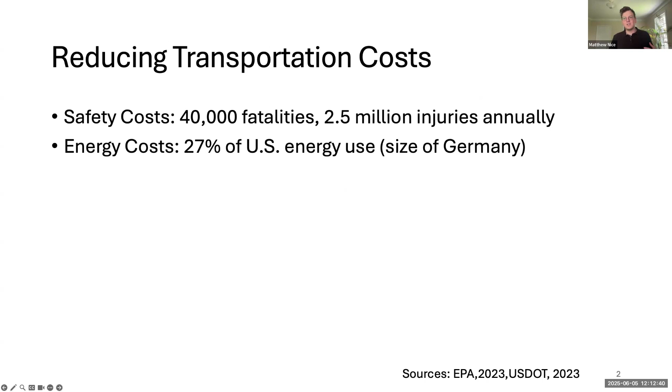In general, there are big safety costs in transportation that we're all interested in reducing, along with energy costs and economic costs. There are different approaches, probably well represented in this room, looking at how we can use transit to address these things, new and revitalized infrastructure, and changing and adapting policies to modern environments.

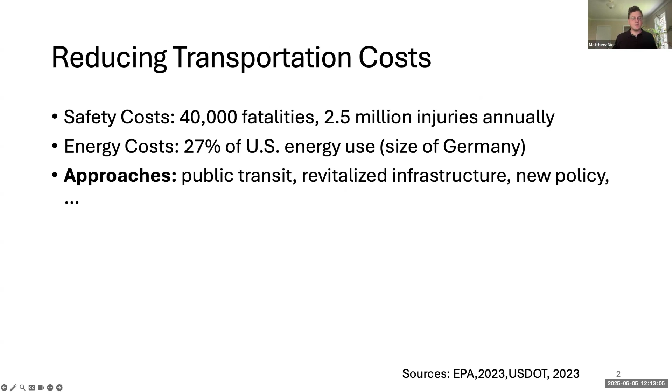All these are ways to attack these problems. My approach, as a researcher, is really just thinking about technologies and how they can help — that's my angle. Things like connectivity give new information pathways to act on problems, whether you're a pedestrian or, in this case, talking about vehicles. The same goes for automation — new pathways for making decisions and controlling cars. So again, they're just tools to try and address our greater problems.

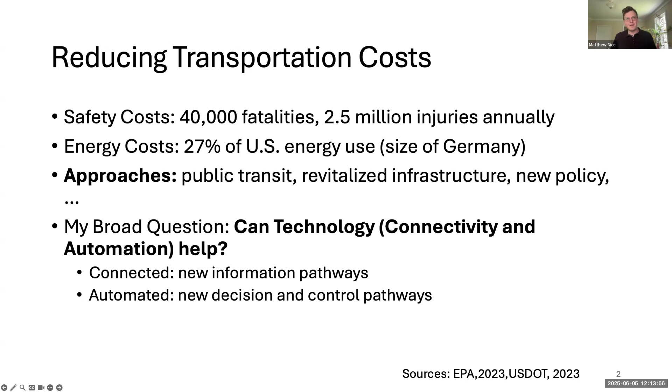A little bit of research history I think is really interesting is this idea of stop and go traffic, something we see a lot in the DC area — we see it everywhere, right? This was first filmed in a rigorous way back in Japan in 2008.

The video quality is a little low for our modern standards, but what you'll see is cars driving in an isolated ring road, just driving in a circle — there's no bottleneck, no crash, no merge, none of that stuff happens. But what starts to emerge is a bunching effect in the cars as they drive around, and the bunching effect gets larger and larger. You can see it traveling backwards from the direction of travel of these cars.

This is exactly what Griffin had touched on. It creates an inefficiency in slowing things down — an energy inefficiency from speeding, accelerating, and stopping — and also an increased risk of crash. All of these things are well documented at this point. It can come just from the interaction of people driving; you don't need anything else, just a lot of people driving on a highway for this to happen.

Fast forward a few years, and you go over to Arizona, where they ran this same experiment but added in a critical twist: they put in an automated driving vehicle, the one with the black arrow on top of it in the ring. Again, you see the bunching happening, and then they turn on the automated driving aspect — now the arrow is red — and it totally erases this effect.

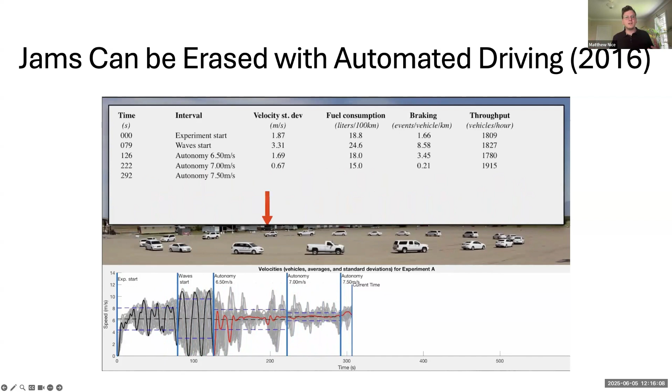It's a potential benefit, though it's still in an isolated environment here, a ring road, not the I-95. It still shows that there's potential in using technology to basically solve something we couldn't do just with the natural physics of driving. It adds something - only one car out of 21 removes something that in principle is solvable, but you needed a little push from technology to smooth things out.

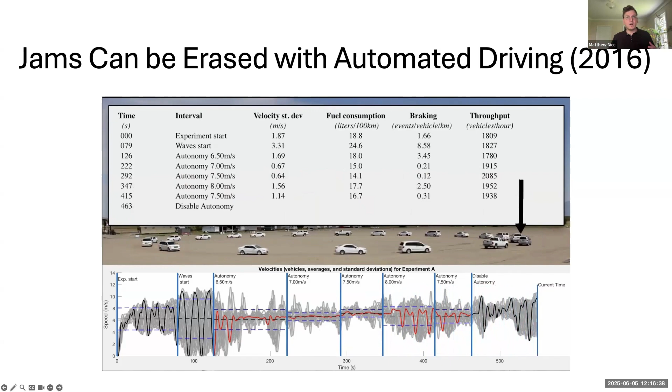Okay, so this is really interesting. And this leads to part of this work I'm working on right now in this variable speed limits space. This is something Griffin touched on, this active traffic management concept. There's lots of different ways traffic engineers try to do this, to meter traffic and keep things running smoothly. One of the approaches is variable speed limits.

This is something implemented in Seattle, Tennessee, and Virginia, where you have some sort of sensor downstream in traffic. Our cars are driving, can't see what's going on. So some variable speed limits algorithm takes in this information from downstream and can communicate this to us by recommending with a sign or gantry, hey, you should probably think of slowing down before a stop you can't see - it's too far ahead. One of the critical aspects of this, to be most effective, is to have compliance with these posted speed limits. If no one heeds the information or warning, it won't make a big difference.

As a researcher, and just as a person who drives on these roads, I thought, well, a lot of people don't really follow these. It would be interesting to see what would happen if you had an automated control car that went exactly at the speed limit as it changed while driving down the road. So that's what we did.

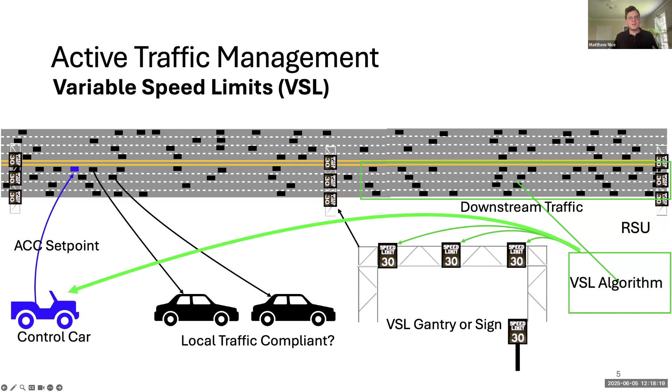I'm going to show you the experience. This is your portal into an experience of an automated car that drives exactly as the infrastructure prescribes it using connectivity.

So I went out - this was a drive early morning, around 6:45, I think. We were driving the posted speed limit, legally enforceable posted speed limit, and this pickup truck passed us on the left aggressively, honked the horn, some friendly hand gestures like, why are you driving that slow?

This is a quote from as we were driving: it was difficult for the driver to go the speed limit. It feels like it should go much faster than what the system recommends. And then lo and behold, within 40 seconds, we're stopped right behind the car that aggressively passed us. So this indicates that these recommendations are useful and accurate - we were wasting time speeding up into a stop. But there's more to it.

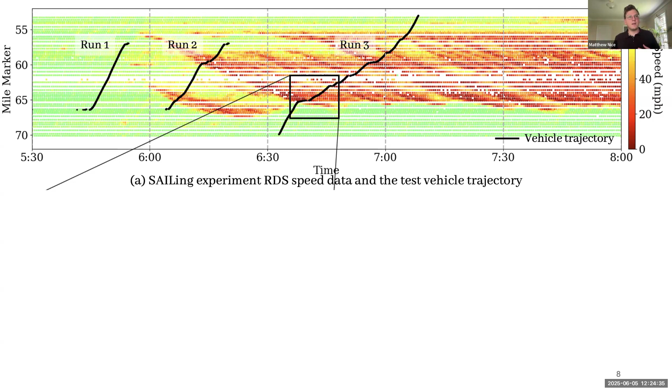That's what we want to communicate with variable speed limit signs—it's a good area for them to shine, telling people: you can't see it yet, but there's going to be a big slowdown. So here, from the perspective of the car itself, we can take a cross section and show the sensors.

So this technical solution, which is correct in a formal sense, doesn't actually address the full problem. This is what I wanted to highlight as one of the difficult pieces of V2X technology, connected vehicle technology—as a practical matter, it needs to address this kind of dilemma.

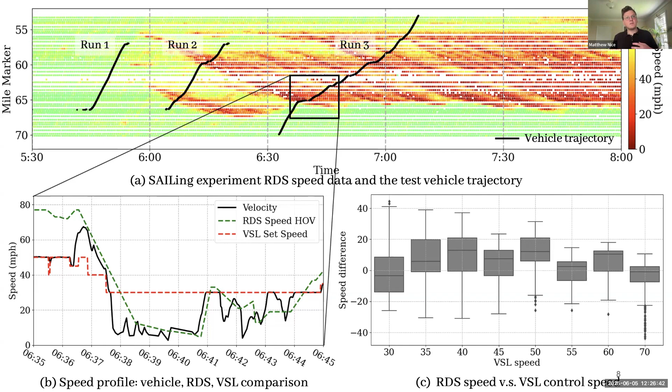This last one shows the distribution of speeds relative to the speed limit, on a roadway in Tennessee. As speed limits change, people often go 10, 15, sometimes 20 miles an hour over the posted speed limit, mostly because they'd rather keep up with traffic around them than follow what's recommended from the infrastructure.

So again, we went out and tried this kind of middle way path, which would add more flexibility to the connected vehicle concept, to try and support the goals of the variable speed limit system by driving with the recommended speeds—taking into account both the local traffic and the recommended speeds.

And it looked a little bit like this, where there's these red areas in my graph in the background where you're going slower than the speed limit because you're just following the car ahead of you. You can't go any faster. Green areas where we're exactly at the speed limit, and then a little bit of flexibility if the speed limit or the speed of cars around are going significantly faster than the recommended speed, to go somewhere in the middle that still supports compliance with the system without being rigidly compliant and having someone totally avoid the use of the system altogether.

This reminds me of videos I've seen online of toddlers who will spill their juice a little and then get frustrated and throw the whole thing away. We don't want to create systems that force people to make decisions like that. Instead, you can have a little bit more flexibility to try and support the safety goals and efficiency goals of the system.

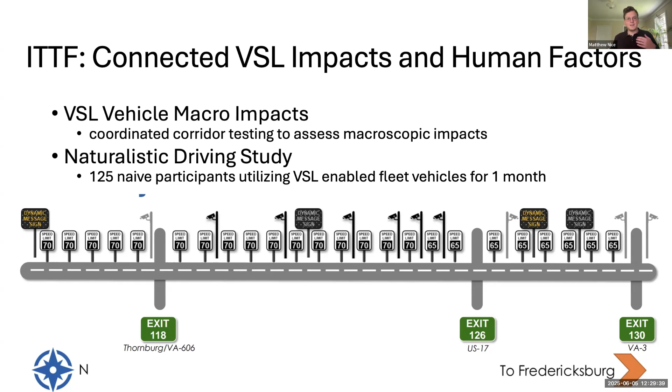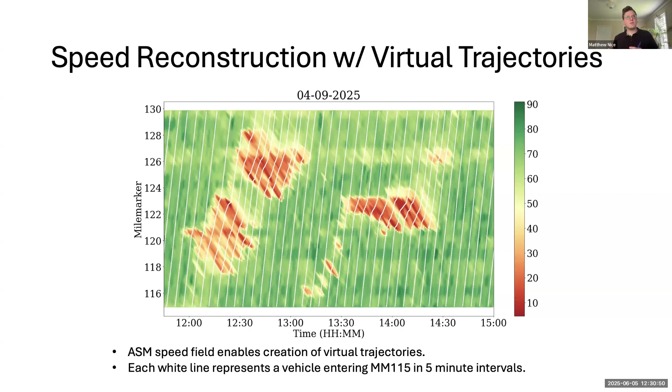And then you can take that and look at trajectories of vehicles overlaid on it. How are they moving through this speed field, through the traffic, through the congestion? This is representing how, if you look like kind of pinstripes bending over the slowdown areas, this is exactly how cars would drive through this traffic. This was from a couple of months ago.

And then again, these lead to - we can look at this, our exact problem that we're going to be studying now. When we bend this speeding into a stop, we see the same behavior again in all of these systems. What will happen when we, at scale on a real interstate, bend these trajectories towards matching the recommendations given by the fixed infrastructure?

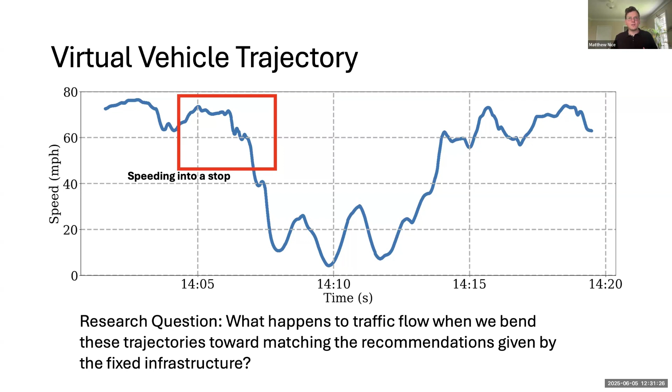So this is just some of the buildup to what we're looking forward to seeing soon. But we don't have the answers yet - this is the study that's ongoing. And it will look something like this. This is not real trajectories.

These are simulated ones that have a set of cars going in a loop - 25 fleet cars driving near each other, not one after the next, but near each other down the roadway - and be able to, we think, influence the flow of traffic to try and avoid that speeding up into a stop, and then supporting the safety, energy efficiency, and congestion effects improvements from our variable speed limit system.

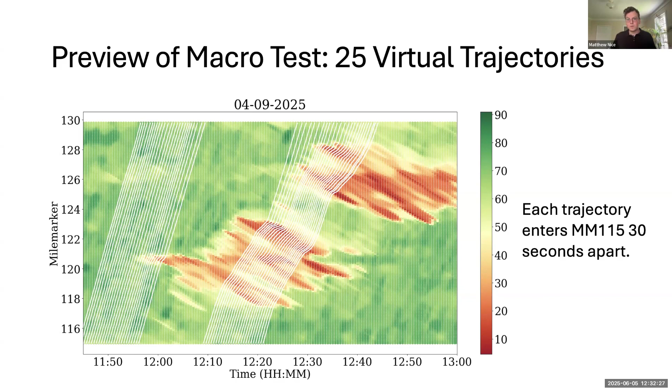With all of that said, I'd like to stop there for questions from the room. And thank you for your attention. Please feel free to reach out to me and my co-PIs on this project over email if you have more thoughts later on. But yeah, thank you.